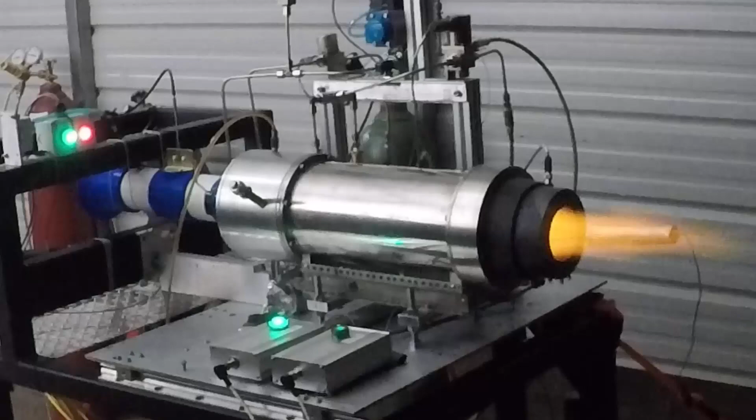The air turbo rocket is a propulsion system that combines concepts from rocket motors and turbojets to enable operation from standstill to high supersonic, low hypersonic flight speeds, with a high specific impulse and high thrust-to-weight ratio.

These characteristics make the ATR engine cycle a good candidate for applications such as high-speed point-to-point transportation and as an air-breathing component to space launch systems.

This video provides an introduction to the air turbo rocket and compares its characteristics to those of a rocket and turbojet. We'll also look at video footage of recent ATR hot fire testing, some of which is being previewed here.

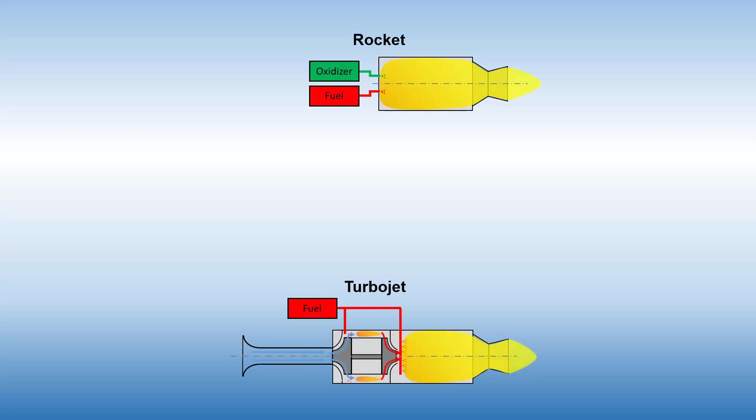Let's start by reviewing the basics of rocket and turbojet operation to set the stage for a description of the ATR, and then a comparison of the engine to these well-established propulsion systems later in this video.

Although there are many possible rocket configurations, for the purpose of this video, we'll focus on the bipropellant pressure-fed rocket due to its similarity to our current ATR development work.

The bipropellant pressure-fed rocket consists of a fuel source, such as a liquid hydrocarbon like kerosene or propane, and an oxidizer source, such as liquid oxygen or nitrous oxide.

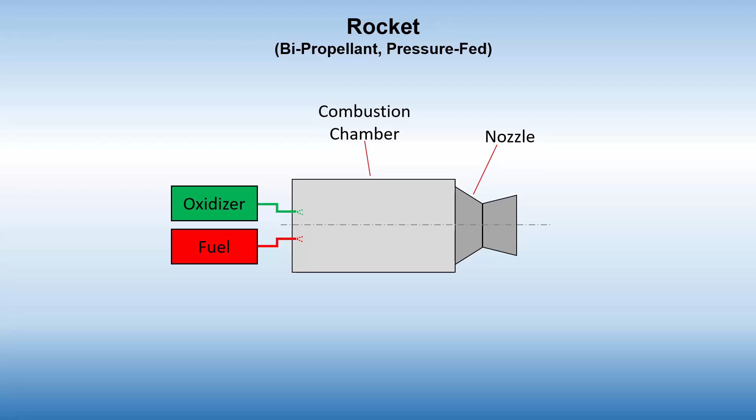A pressurization system injects the propellants into a chamber where they mix and burn. The resulting hot, high-pressure combustion products flow out of the nozzle to produce thrust.

In a turbojet, fuel enters a combustion chamber where it mixes and burns with air that's been raised to a high pressure by a compressor.

The hot, high-pressure combustion products expand over a turbine, which in turn drives the compressor. The remaining pressure head is then expanded through an exhaust nozzle to produce thrust.

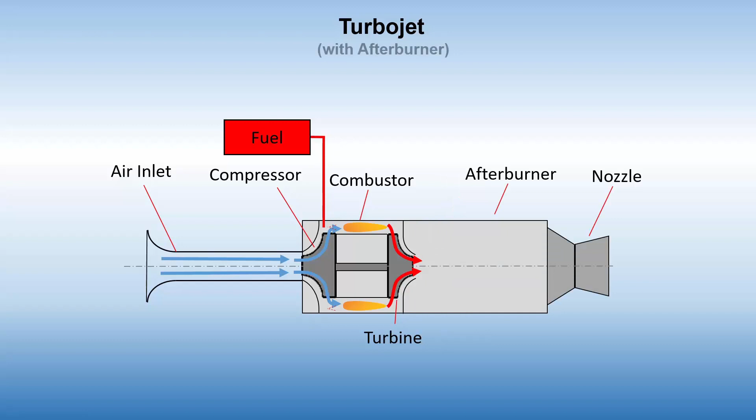In an afterburning turbojet, additional fuel is injected into a secondary combustion chamber downstream of the turbine, known as an afterburner. This additional combustion process raises the temperature of the flow before it exits the nozzle and can generate a substantial amount of additional thrust.

For example, the afterburner of the Pratt & Whitney J58 used in the SR-71 increased engine thrust by 40%.

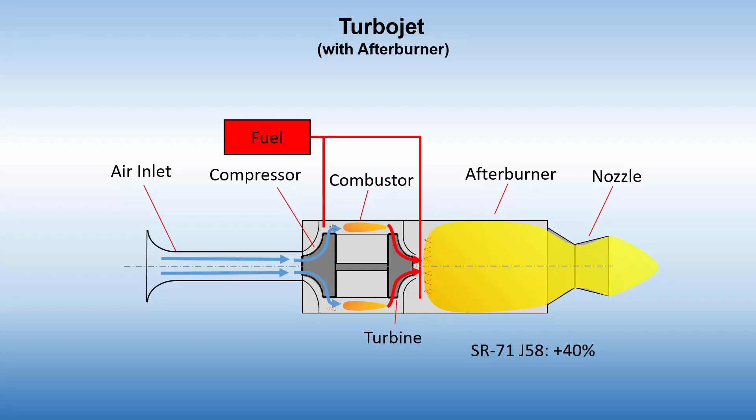In flight, an inlet is needed to provide the correct conditions for engine operation. A bell mouth inlet, as shown here, is only used for ground testing.

The air turbo rocket combines concepts from the rocket and afterburning turbojet. In the ATR, a component known as a gas generator is used to produce a high-pressure, fuel-rich gas. Here, we're showing a bipropellant gas generator.

The gas generator, or GG, can be thought of as a small liquid rocket motor that is operated at fuel-rich conditions, and thus not all of the fuel combusts within the device.

The GG of a bipropellant ATR is also conceptually similar to the pre-burner of a fuel-rich staged combustion rocket engine.

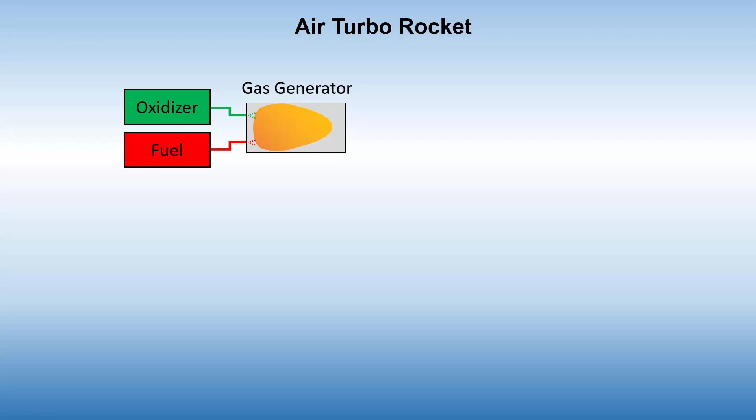The GG effluent travels down a gas transfer tube and expands through a turbine, which in turn drives a compressor. The compressor forces ambient air into the main combustion chamber.

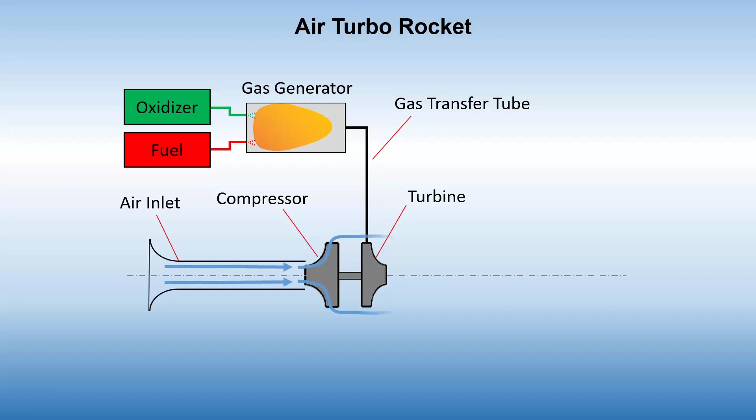Here, the fuel-rich turbine drive gas mixes with the compressed air in a secondary combustion process, similar to that of the afterburner in the afterburning turbojet. The resulting combustion products are then expanded through the nozzle to produce thrust.

As with a rocket, other propellant configurations are possible for the ATR. For example, the ATR can also use a monopropellant or solid propellant in the gas generator.

Regardless of the propellant configuration, the purpose of the ATR gas generator is to produce a gas stream that is hot, at high pressure, and fuel-rich.

As mentioned earlier with the turbojet, the bell mouth inlet shown here would only be used for ground testing, and a purpose-designed inlet would normally be used for flight operations.

One subtle but very important distinction between the ATR and the afterburning turbojet is that the pressure in the ATR main combustor is much higher than that in the turbojet afterburner. Typically, an ATR combustor operates at about twice the pressure of a turbojet afterburner.

This difference in operating pressure is due to the fact that in the ATR, the air from the compressor immediately enters the main combustor, as is highlighted here.

In contrast, in the afterburning turbojet, the air from the compressor experiences a significant pressure drop as it expands through the turbojet's turbine prior to entering the afterburner.

Because the working fluid in the main combustor of the ATR is at a much higher pressure than that in the turbojet afterburner, even at the same temperature, it has more available energy to generate thrust. As a result, the ATR can produce more thrust than an afterburning turbojet of a similar size.

It also has a higher specific thrust, or thrust per unit mass of airflow, and higher thrust per frontal area than the afterburning turbojet.

The thrust advantage of the ATR comes at the expense of a higher total propellant flow rate because the source of all shaft power to drive the turbo machinery is derived from onboard propellant supplies.

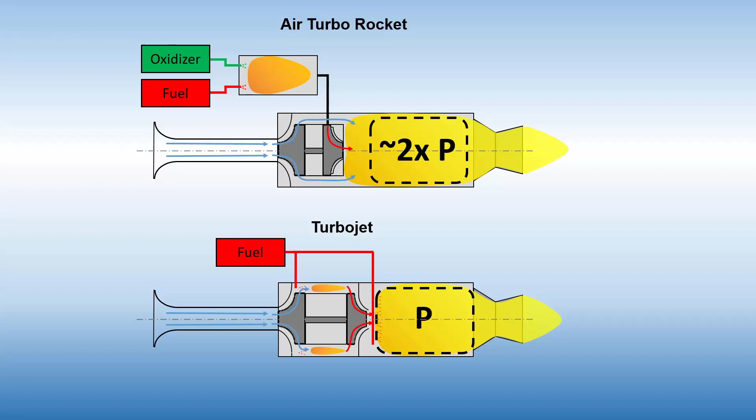We'll look at the trade-offs between the turbojet, ATR, and rocket in detail momentarily.

Before doing that, though, let's look at a prototype air turbo rocket in development by a consortium of firms formed by Bergmans Mechatronics, BSRD, C3 Propulsion, and Streamline Automation in Huntsville, Alabama.

Near-term objectives of this work are to demonstrate the basic feasibility of the ATR concept, to serve as a testbed for various ATR hardware and propellant configurations, and to anchor performance prediction models for the engine.

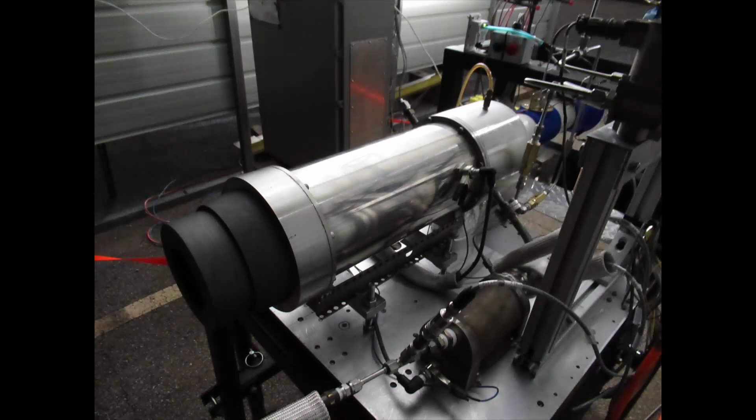Several key components of this gas generator cycle ATR engine are highlighted here. In this view, we can see the gas generator mounted adjacent to the main body of the ATR. Hydrogen and oxygen mix and burn here to produce a high-pressure, high-temperature, fuel-rich turbine drive gas. The gas passes through the gas transfer tube, then enters the turbine and compressor housing, where it spins the turbine.

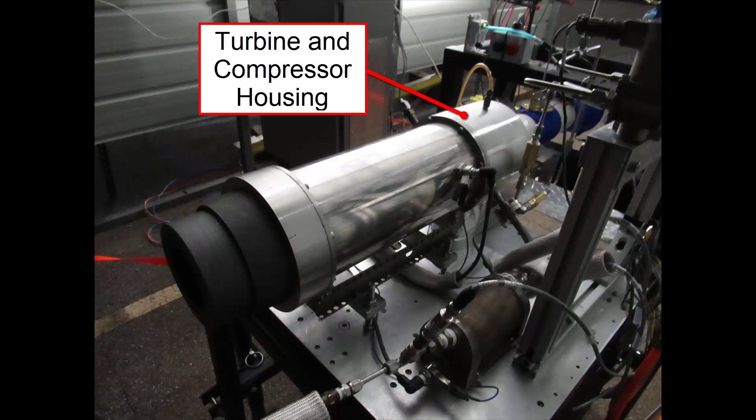The turbine drives the compressor, which draws in air through the air inlet. The compressed air and unburned hydrogen from the GG mix and burn in the main combustor. The combustion products then expand through the nozzle to produce thrust.

Here are two camera views of an initial hot fire test of the engine that was performed in late 2019.

Let's watch this test again, this time using the Diadem data processing program to show time histories of engine RPM, normalized thrust, and normalized airflow rate data, along with the camera footage of the test, which has been synchronized to these time histories.

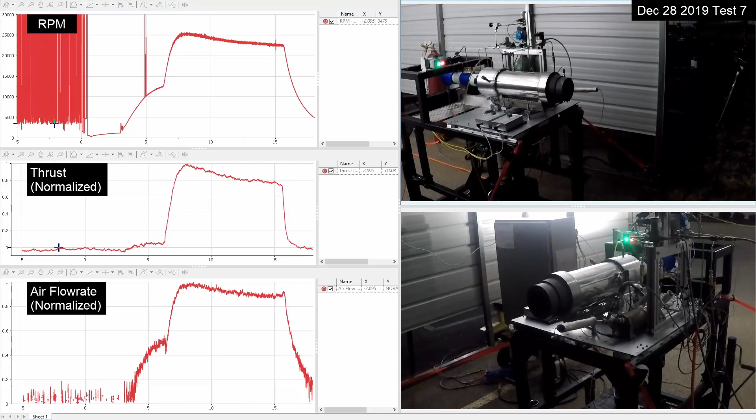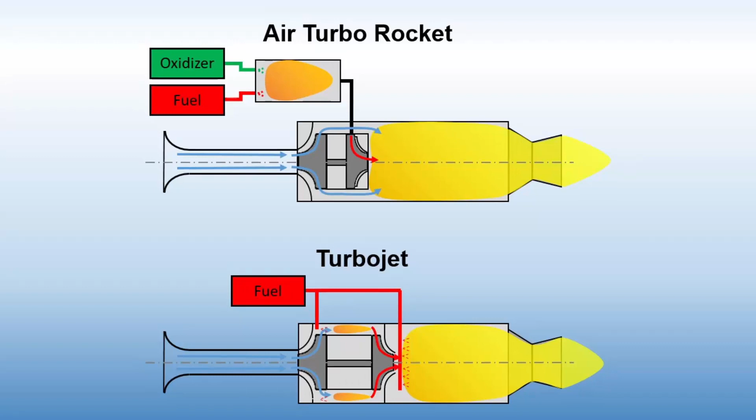As mentioned earlier, the higher thrust of the ATR relative to a similarly sized turbojet is achieved through a higher propellant flow rate. That trade-off is just part of the range of performance characteristics that exist when comparing the rocket, ATR, and turbojet cycles. Let's now take a look at this bigger picture of performance characteristic trade-offs.

First, we'll compare the ATR to a rocket. Since the ATR uses ambient air as oxidizer and reaction mass, for the same thrust, it has a lower propellant flow rate and, as a result, a higher specific impulse, or ISP. For the same thrust, the ATR is heavier than a rocket due to the additional turbo machinery and other components required to handle the air. This additional weight results in a lower thrust-to-weight ratio.

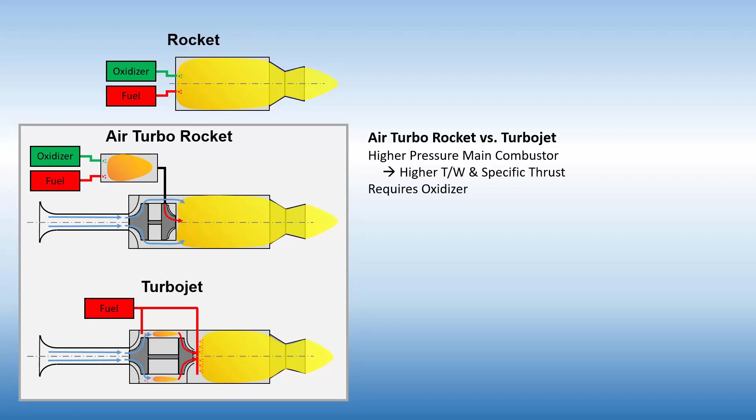Comparing the bipropellant ATR to an afterburning turbojet, the higher combustor pressure results in a higher thrust-to-weight ratio and higher specific thrust. However, it has a lower specific impulse due to the higher total propellant flow rate through the gas generator. To provide a sense for the variation in specific impulse across these three propulsion systems, let's compare typical values for hydrocarbon-based versions of each engine.

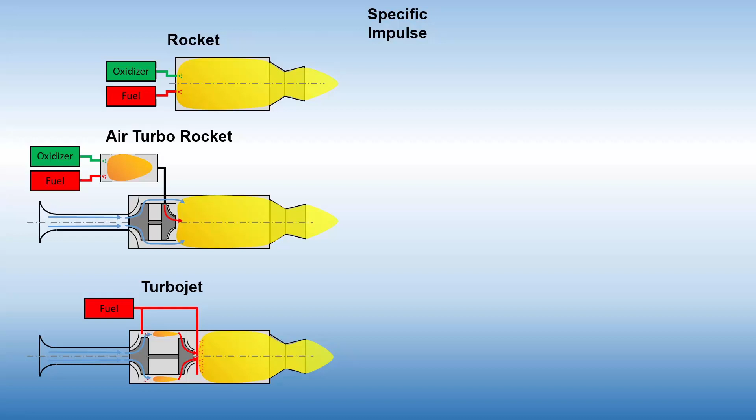On the low end of the spectrum, hydrocarbon-based rockets have ISP values of around 220 to 300 seconds. On the high end of the spectrum, afterburning turbojets have ISPs of around 1900 to 2200 seconds. The ATR has ISP values in the range of 700 to 1200 seconds.

We can do a similar comparison of thrust-to-weight ratios and specific thrust for hydrocarbon-based engines. At the low end of the spectrum, turbojets typically have thrust-to-weight ratios of 2 to 9 and specific thrust of 80 to 120 pounds force per pound mass per second.

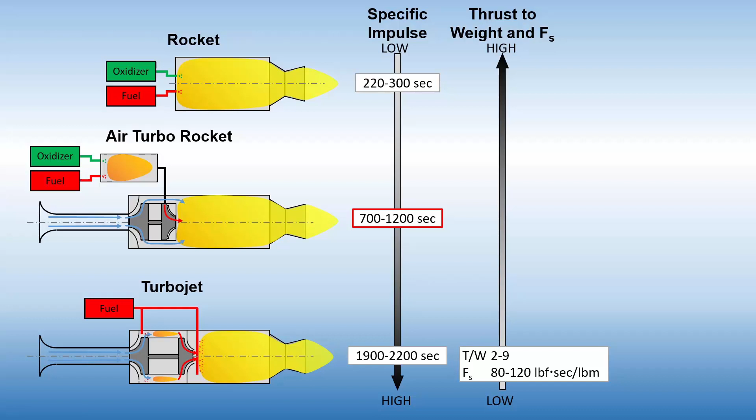At the high end of the spectrum, rockets have thrust-to-weight ratios of 60 to 70 and above. Specific thrust is not applicable for rockets since they don't use air. The ATR can have a thrust-to-weight ratio in the 5 to 50 range, and specific thrust in the 80 to 150 pounds force per pound mass per second range.

Comparing the three propulsion systems in this way, we can see that the ISP and thrust characteristics of the ATR sit between those of a rocket and turbojet. Although rockets and turbojets are well-established propulsion systems, we believe there is a performance gap between these two technologies, where the ATR can improve existing applications and create new ones.

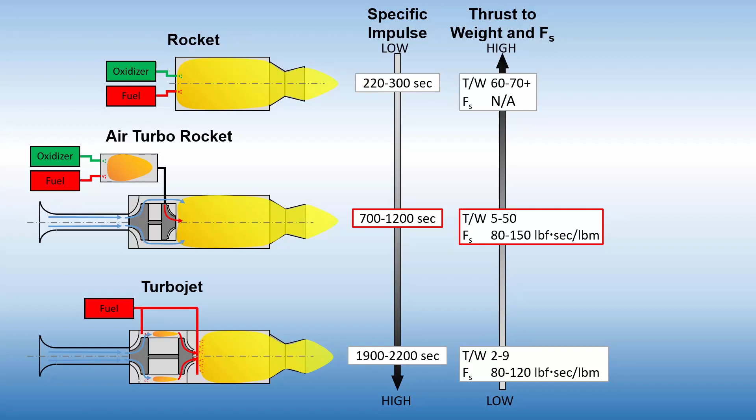One way to think about possible applications for the ATR is to first look at the existing roles of rockets and turbojets. Rockets, having high thrust-to-weight and low ISP, are best suited to accelerating payloads to very high speeds, such as in orbital launch vehicle or time-sensitive tactical missile applications.

An important characteristic of these applications is the large quantity of propellant that is consumed relative to the vehicle and payload mass. This characteristic tends to make rockets best suited for applications where the cost of the propellant and vehicle are negligible relative to the value of the payload or the mission.

Turbojets, with their high specific impulse and low thrust-to-weight ratio, are ideal for relatively slow, long-range cruising applications. The high specific impulse of the turbojet, which can also be expressed as low specific fuel consumption, enables the quantity of propellant consumed during a mission to be low relative to the vehicle and payload mass. This relationship enables high reusability of the vehicle, which in turn drives down operating costs.

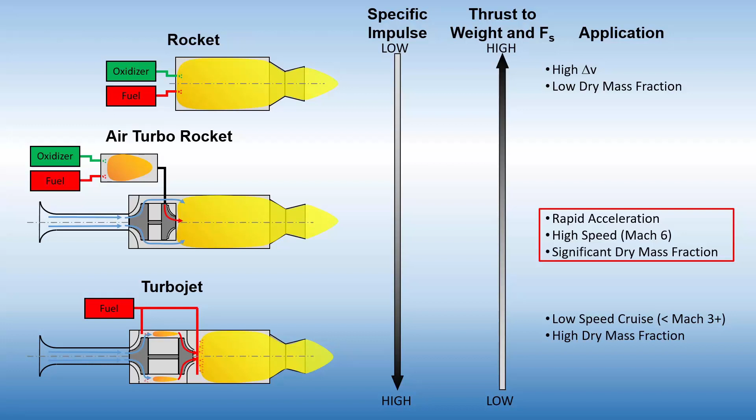Interpolating between these two extremes, we anticipate that ideal applications for the ATR are those that require a combination of high thrust-to-weight ratio to achieve rapid acceleration from standstill to high supersonic, low hypersonic flight speeds, and high specific impulse to enable high dry mass fractions, which in turn enable aircraft-like operation and reusability.

A few example applications for which we think the ATR is well-suited include winged flyback boosters for two-stage-to-orbit space launch systems, high-speed point-to-point transportation, special-purpose drones and target vehicles, consumer applications such as high-performance remote control planes and rockets for use by serious amateur enthusiasts.

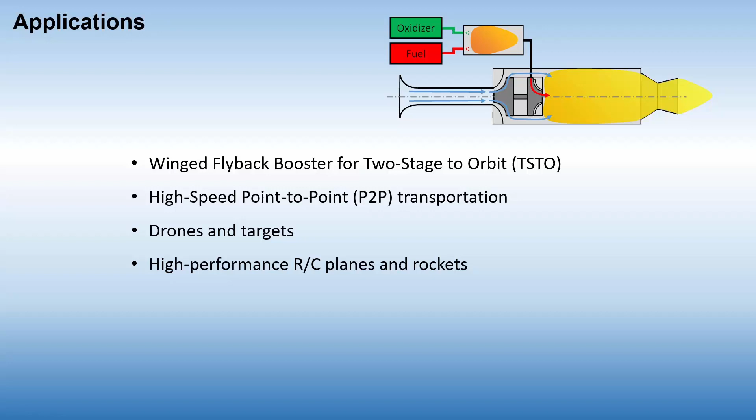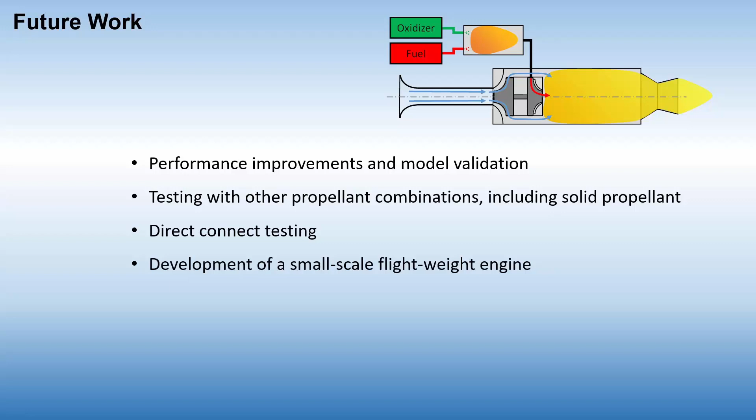We plan to continue to improve the performance of our prototype engine and to use test data to validate our engine performance prediction model. We are also planning testing with other propellants, including a solid propellant, direct connect testing to evaluate engine performance at simulated flight conditions, development of a small-scale flight-weight engine, and flight testing.